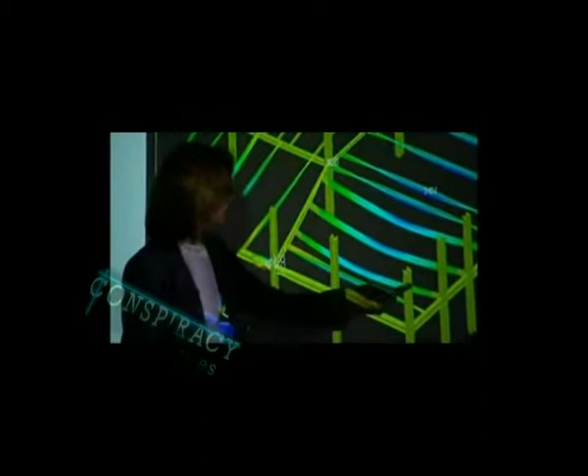The red area shows where we had observed structural damage. You can see large sagging or buckling occurring in some of these floor beams, and these circles indicate the condition of the connections, where yellow is a partial failure and pink is a full failure, where the entire connection no longer is attached to the column.

Our working hypothesis now suggests that it was normal building fires, growing and spreading throughout multiple floors, that may have caused the ultimate collapse of the buildings.

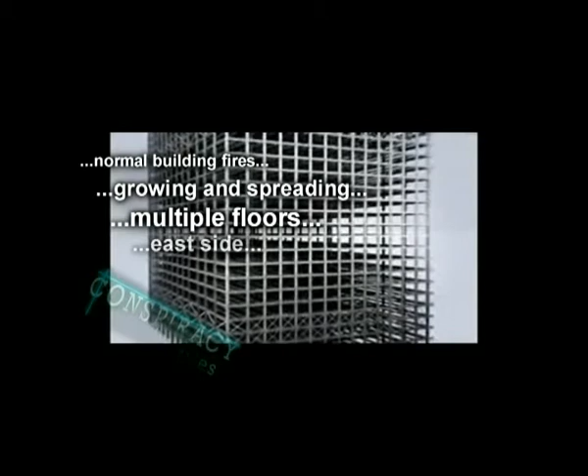Investigators have focused on the east side, where the long floor spans were under most stress. They think fires burnt long enough to weaken and break many of the connections that held the steel structure together. Most susceptible were the thinner floor beams, which required less fireproofing, and the connections between the beams and the columns. As they heated up, the connections failed, and the beams sagged and failed also.

The combination of those two effects makes that column go unstable. When that happens, it leads to a very large unsupported column length. When you have connections that essentially don't have strength for the loads they are subjected to, and you have this massive failure of a column, it does not take time. The structure has lost all integrity at that point.

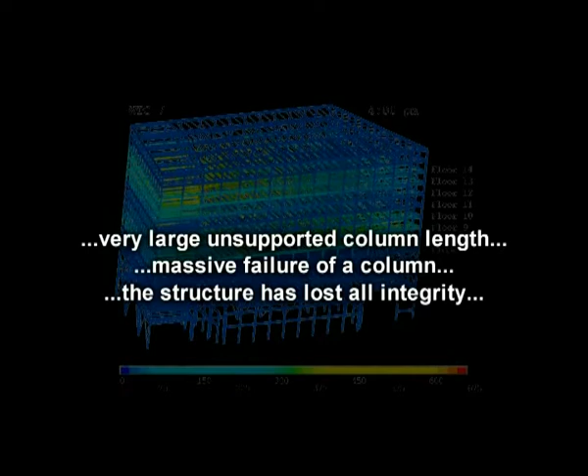Indeed, the working hypothesis sounds very familiar. In fact, it is a reissue of the FEMA hypothesis of the failing truss connections called the pancaking theory. Once FEMA brought it to light, anyone who criticized the pancaking theory had to be a conspiracy nut. Later NIST ceased to support the pancaking theory because they found no evidence at all. Fireproofing or no fireproofing, the truss connection didn't fail.

In 2002, NOVA depicted a scenario envisioned by many experts at the time, that the truss connections failed in the extreme heat, causing the floors to fall onto one another, precipitating the collapse.

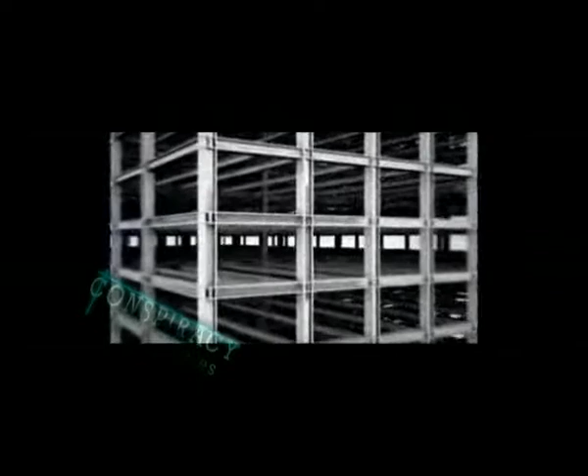Investigators have focused on the east side, where the long floor spans were under most stress. They think fires burnt long enough to weaken and break many of the connections that held the steel structure together. Most susceptible were the thinner floor beams, which required less fireproofing, and the connections between the beams and the columns. As they heated up, the connections failed, and the beams sagged and failed also.

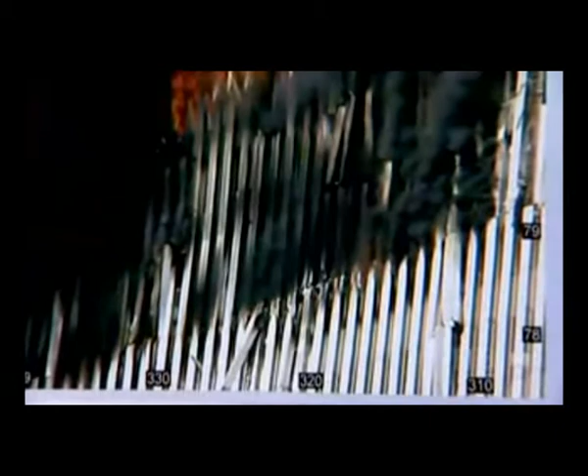When you did it previously, you showed that the floors actually pancaked. And we did not see any evidence of pancaking in the videos or photographs we have. By creating computer-enhanced images of the exterior walls, NIST discovered that the truss connections did not fail. In fact, the trusses stayed connected to the columns even as they sagged from the heat.

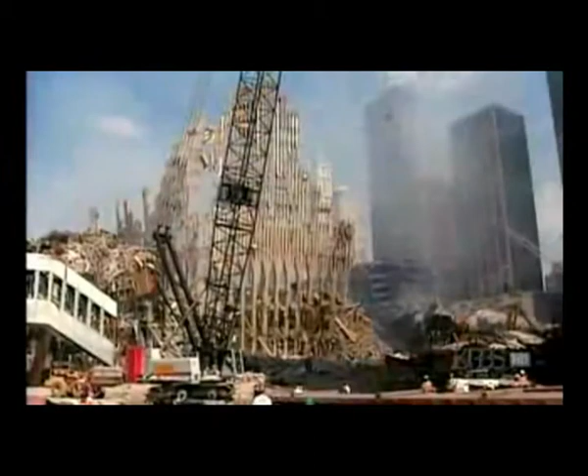The connections failed, and the beams sagged and failed also. The combination of those two effects makes that column go unstable. It was the combination of the impact, the fireproofing that was dislodged, and the jet fuel fires that caused the buildings to collapse.

These buildings were sound, well-designed, highly innovative, and there was nothing that could have changed the outcome on 9/11.

When that happens, it leads to a very large unsupported column length. Fireproofing or no fireproofing, this time the connections of heavy steel beams need to fail on at least 5 floors, one above the other. This picture shows an unsupported length of 3 floors.

Where did the floors go? Is there any evidence for any floor collapse or hanging floor slab in the photos and videos?

According to the NIST interim report, column 79, which had a service load stress of approximately 21 ksi, would be approaching its load carrying capacity for an unsupported length of 4 stories, if it was also subject to a uniform temperature of 500 degrees Celsius.

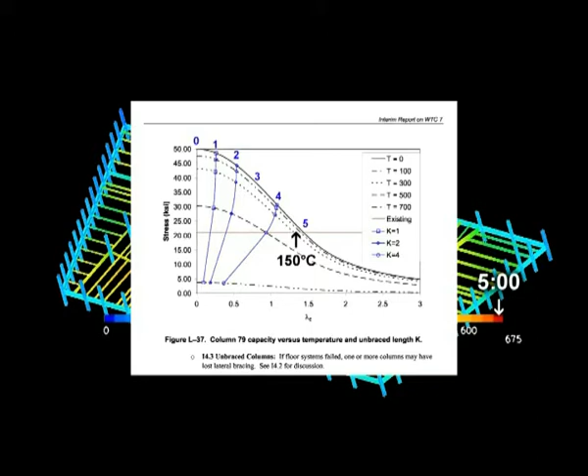And according to the long-lasting inferno of the McGrattan simulation, no column reached a uniform temperature above 150 degrees Celsius, and there wasn't more than 3 floors on fire, one above the other.

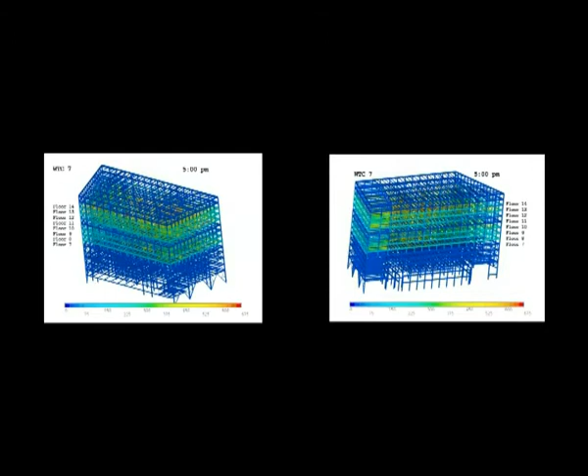So either we have to believe in pancaking without evidence, or the unsupported length cannot exceed 3 floors. Should we believe that no column approached its load-carrying capacity? One may guess that NIST will find a way to square the circle.

However, 5 days after the collapse, an airborne visible infrared imaging spectrometer of the NASA Jet Propulsion Laboratory took a snapshot at ground zero. The AVIRIS indicated a hotspot of still 727 degrees Celsius right below column 81. The temperature scale of the McGrattan simulation doesn't exceed 675 degrees Celsius.

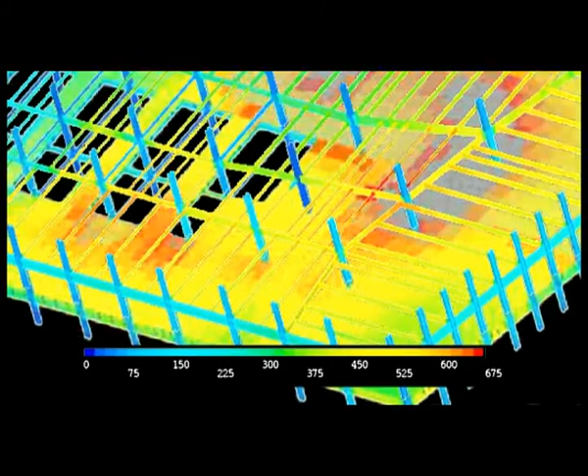Some simulated steel beams of the lateral bracing reached the upper limit of the temperature, but 30 minutes later the color of the same steel beams indicates a temperature of about 450 degrees. Nevertheless, this time NIST has an example of a floor collapse simply due to a normal office fire.

And there's hard physical evidence from another building at the World Trade Center, which helps explain how fire could have caused Tower 7 to collapse.

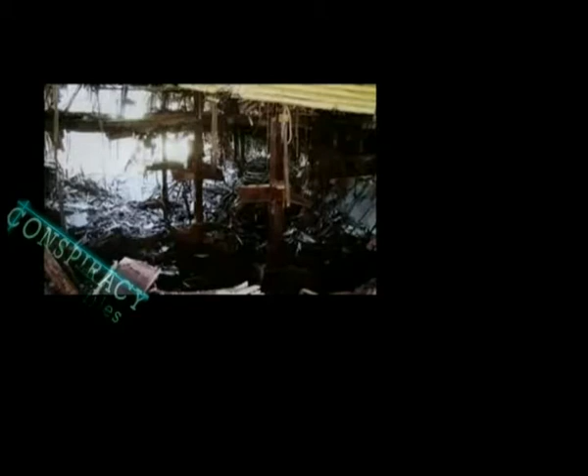Several of us went into Building 5, and as we walked along on the floor, we came to the edge of a concrete slab and looked out and were stunned because we saw a major collapse. We saw an interior section of the building that had collapsed simply due to fire. The structure had lost all integrity at that point in time.

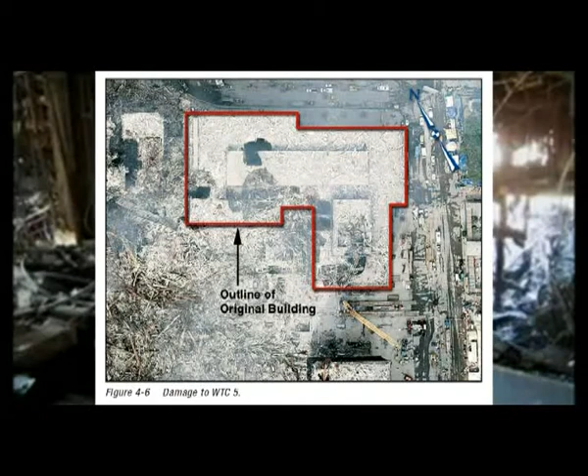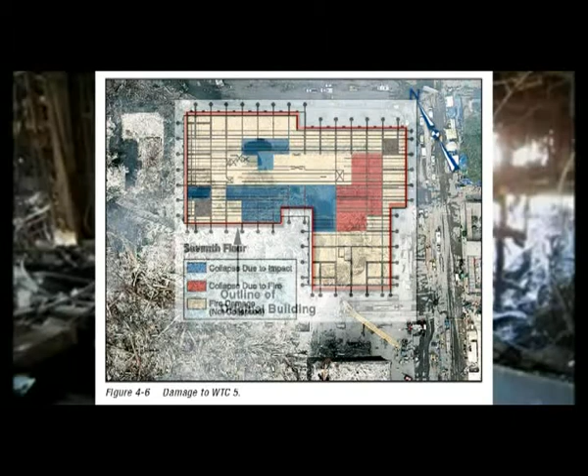But NIST and the documentary forgot to mention something. The color red indicates the area of the collapse due to fire. According to the FEMA report, the 8th floor collapsed onto the 7th floor, and then both onto the 6th, and so on, down to the 4th floor.

There was significant fire damage on floors 4 through 8. On some floors, the interior had been completely gutted by fire.

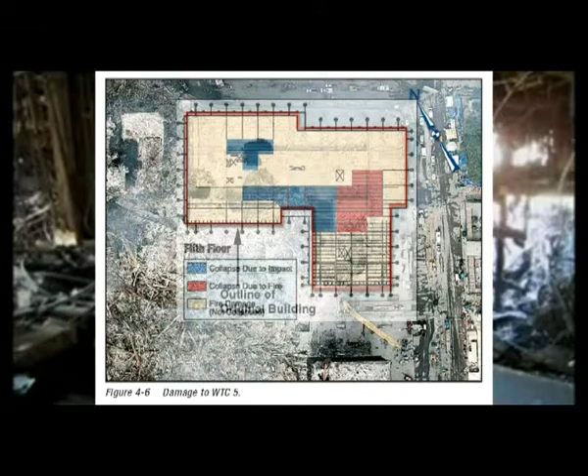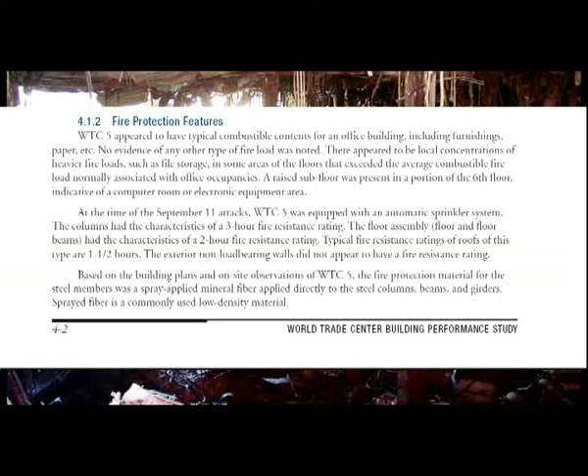Furthermore, we learn that the columns had the characteristics of a 3-hour fire resistance rating, and the floor and floor beams had the characteristics of a 2-hour fire resistance rating.

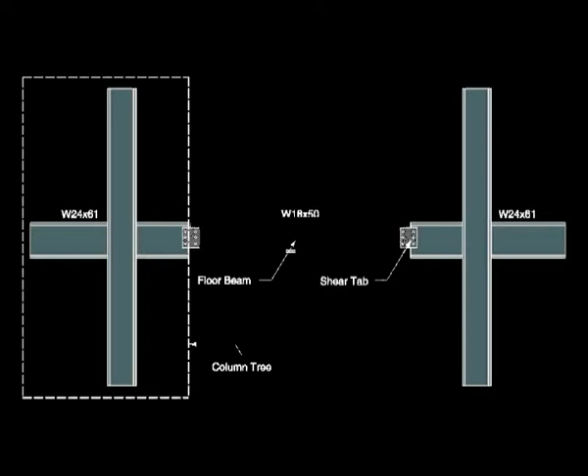Let's say the horizontal floor beams resisted for 2 hours and collapsed a short time later. The combustible material around the column trees fell away, and the columns survived without buckling and without fireproofing. Seemingly the fire around the columns lasted a little longer than a 3-hour fire resistance rating would allow. By the way, the columns and the floor beams of WTC7 had the same resistance ratings.

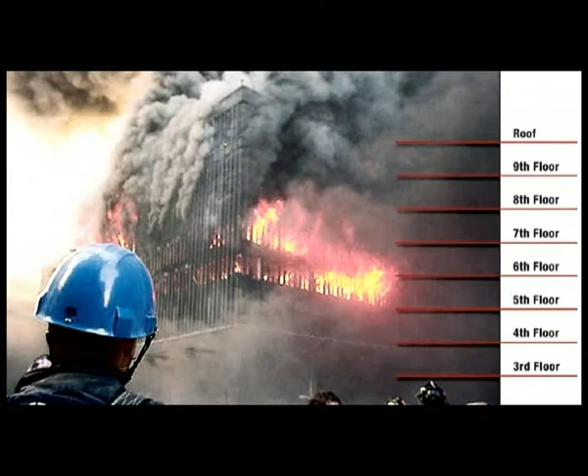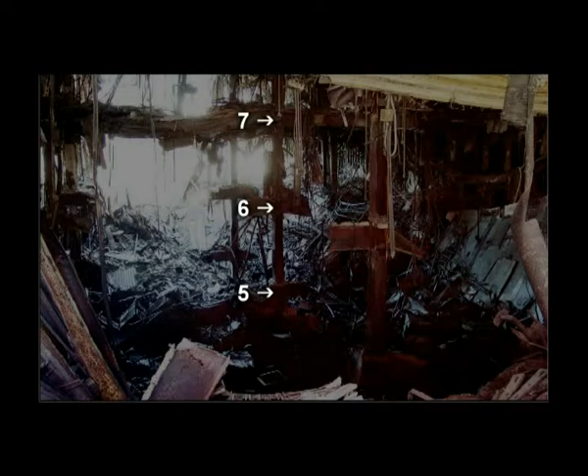Meanwhile, in WTC5 neither floor 9 collapsed due to the upper layer temperature on the 8th floor, nor did the 4th floor collapse due to fire while carrying the loads of 4 collapsed floors. So why did floors 5, 6, 7, 8 collapse, and why did they fall onto floor 4 without enough kinetic energy to pancake it all the way down to the lowest basement level?

Firstly, there was no fire on the 3rd floor. Secondly, the interior bay framing on floors 4, 5, 6, 7, and 8 was different.

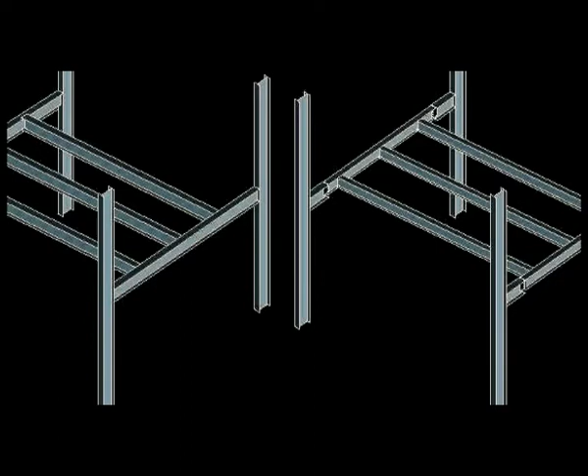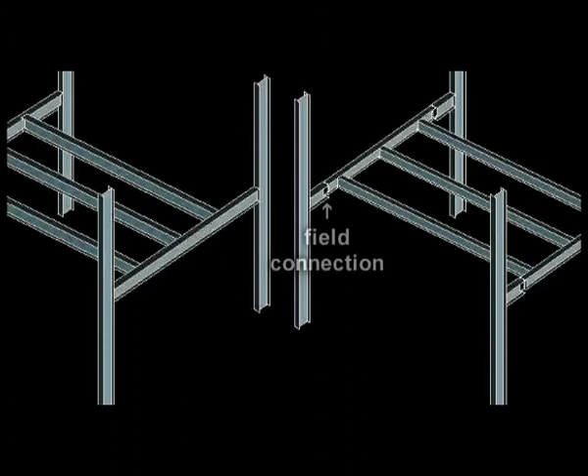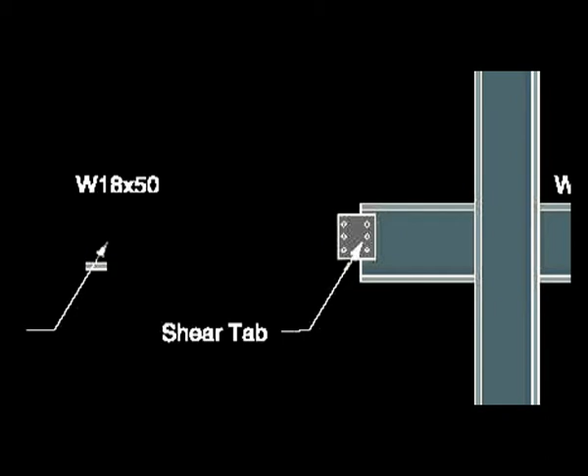According to the FEMA report, the local collapse due to fire appeared to have begun at the field connection, where beams were connected to the shop-fabricated beam stubs and column assemblies. The end-bearing resistance of the beam web was found to be less than the double shear strength of the high-strength bolts. And at 550 degrees Celsius, the ultimate resistance of the 3 bolts decreased by about 50% of the capacity at room temperature.

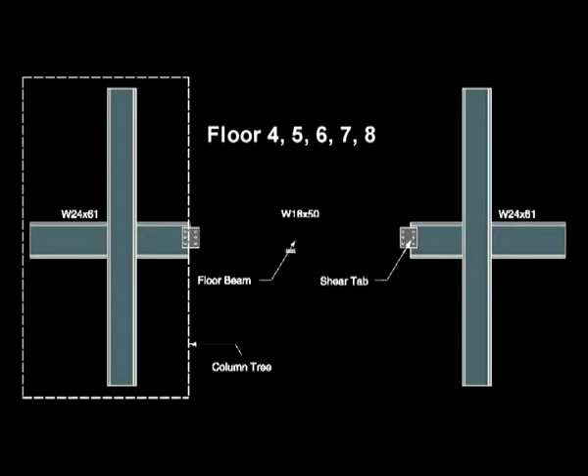So what do we learn from the conspiracy files example? We learn that no other connection failed in that uncontrolled inferno.

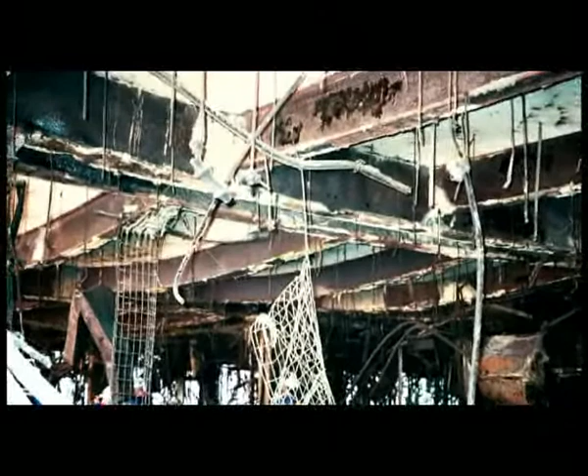The 9th floor sagged due to the upper layer temperature of the 5 burning floors below, but the connections of the 9th floor didn't fail. Even the shop-fabricated beam stubs of the collapsed floors didn't fail.

And finally, the bolted connections of the 4th floor stopped the fall of 4 floors simply because these fragile connections were not exposed to heat and fire from below.

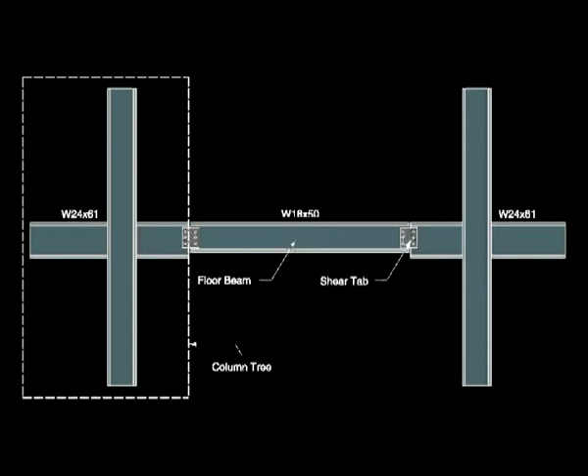One or more columns on the 8th floor buckled due to fire. According to the FEMA report, the fireproofing fell off when the columns started to buckle.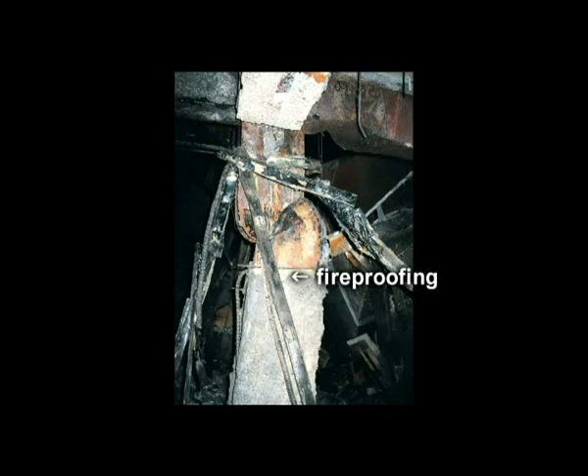But the fireproofing of straight parts of the beam is missing also. Possibly the fireproofing partially fell off due to falling debris that smashed through the roof and hit the floor above. Seemingly fluid roof tar dripped down next to this column.

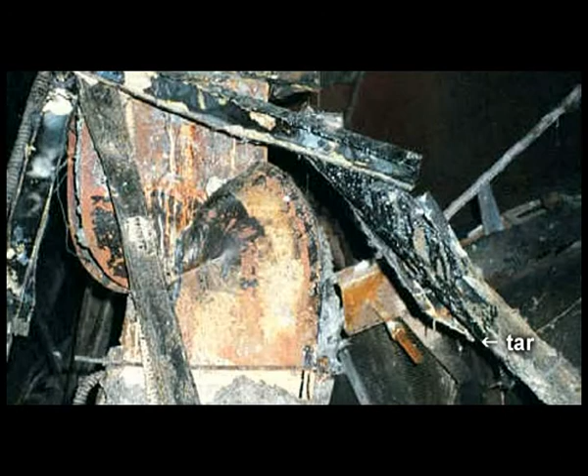For the first time the documentary has shown the same buckled column from a slightly different perspective and daylight flooding through a hole in the 9th floor.

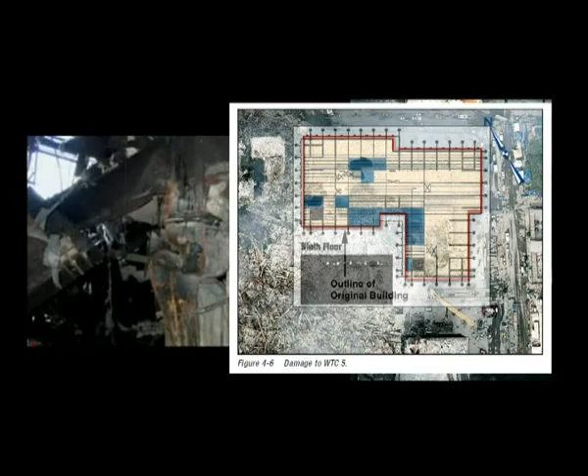But the FEMA report found no collapse on the 9th floor due to fire. In other words, something very heavy crashed on top of this column and crushed the concrete of the roof and the 9th floor. However, this column didn't buckle as fast as free fall.

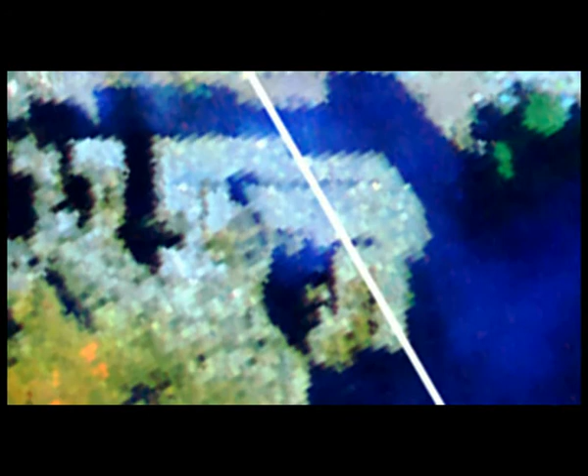6 days later, the rubble of WTC5 was as cold as the West Broadway. As far as is known, WTC7 had neither shop-fabricated column assemblies nor bolted floor beams attached to it. WTC7 had no fire on more than 3 floors one above the other, and besides the simulation, these fires spread relatively quickly and apparently died down after about 30 minutes in the same area.

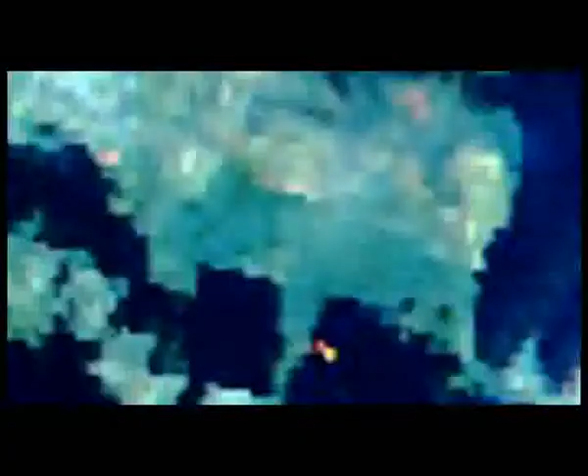12 days later, a small spot in the rubble was still hot enough to fry a pancake on it. And suddenly the rubble disappeared.